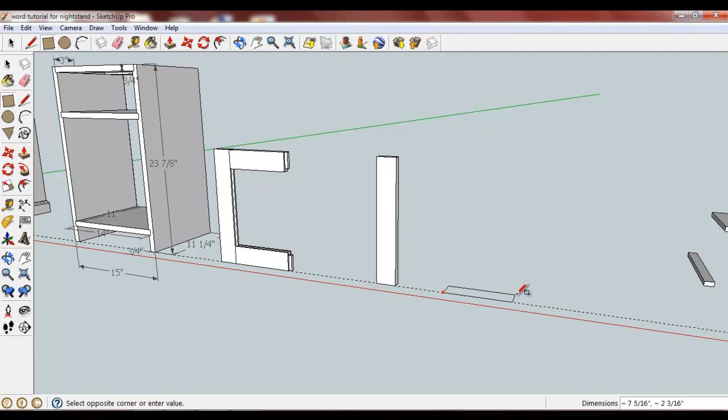We can draw it upwards like so. It's going to be in width 8 5/16. So let's go with 8 5/16, comma 10 3/16.

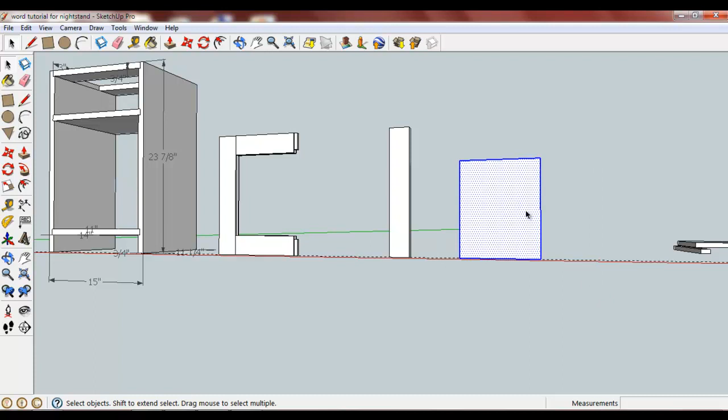And we'll call this the door panel. Great. And this door panel can be moved right into place as well.

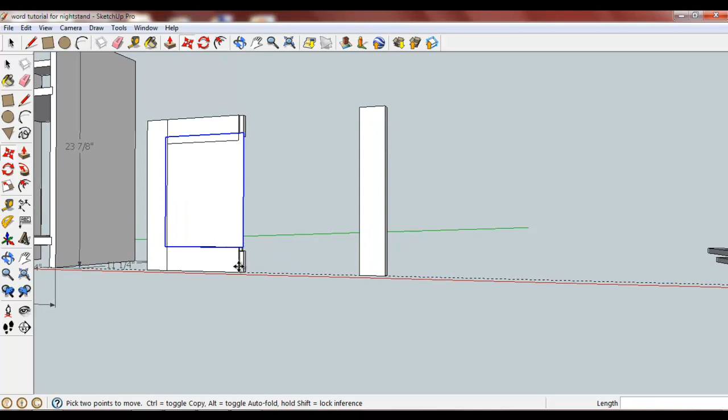I forgot to push-pull it. It's a 1/4 inch thick, 0.25, so make it a 1/4 inch. Okay, now it's ready to move.

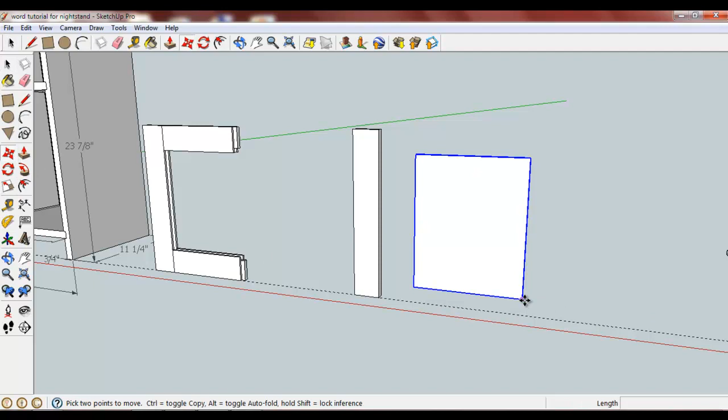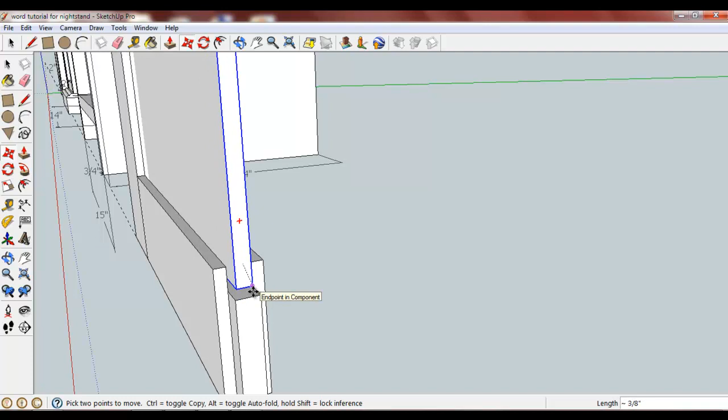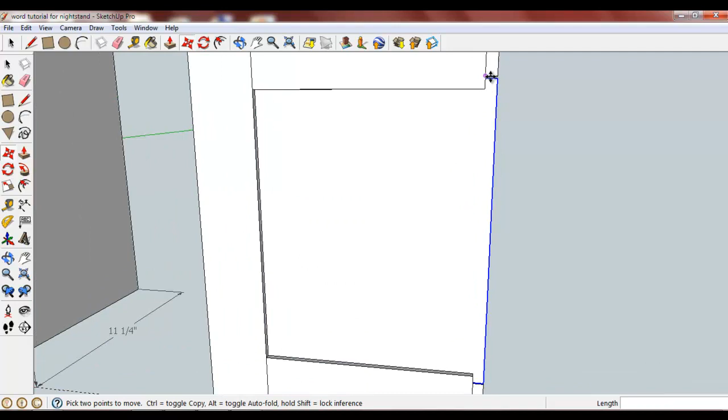And it should wind up being about a 1/16. You notice it has some free play in there because our opening is supposed to be 3/8. And you know, you could place this pretty much anywhere right in there because this panel has some free play. You notice there's a 1/16 gap there, that's fine.

So we could move this over just a hair. And what we could possibly do is, if we wanted to be very precise, is draw a tape measure guide over 1/16. And you can see how close that placement was.

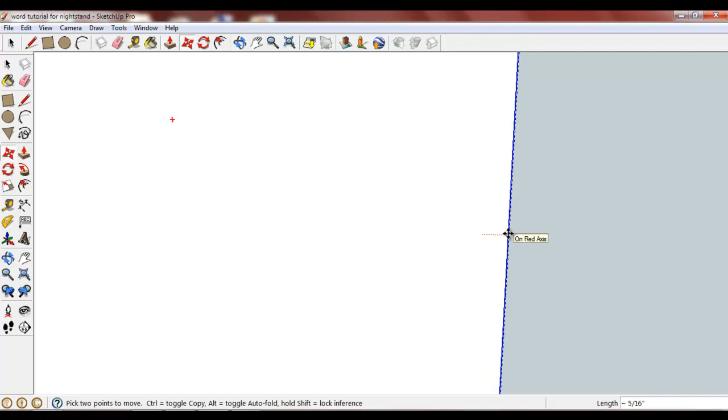Now if I wanted to place it right on that line, I don't know if I moved it up or down. Looks like I did. So there we go. That just kind of helps you place it better, and then get rid of these guidelines

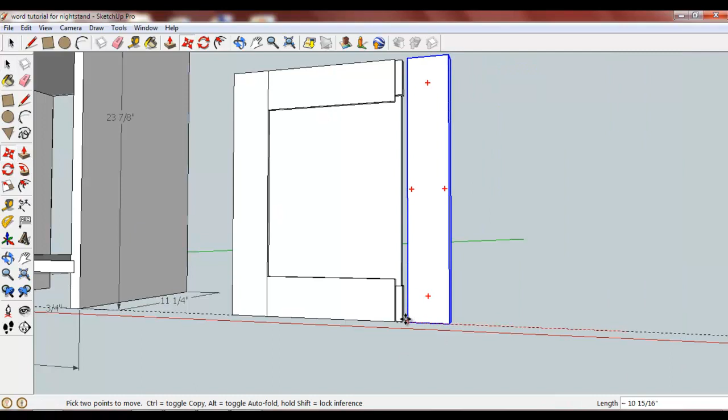that we don't need and move this last part over. And there's our door.

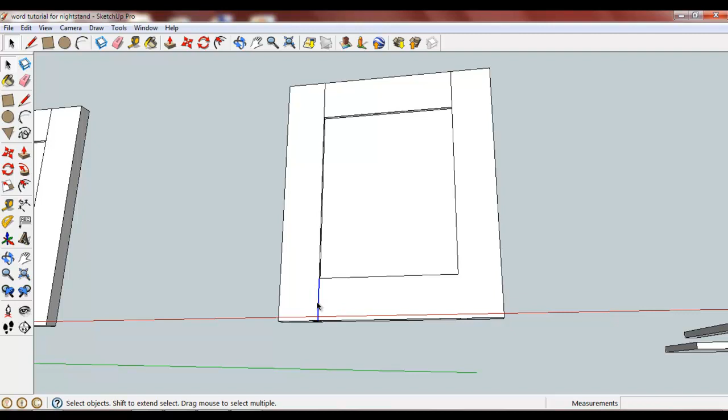Alright, what I did is I just made a copy of what we just made. I'm going to right click and explode everything. And then I'm going to get rid of this line, this line, this line, and this line.

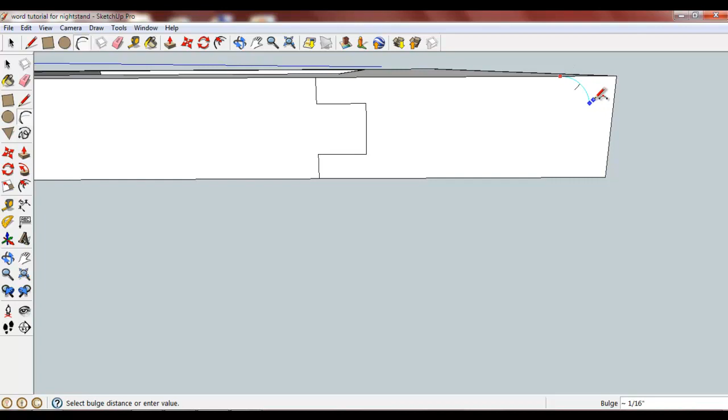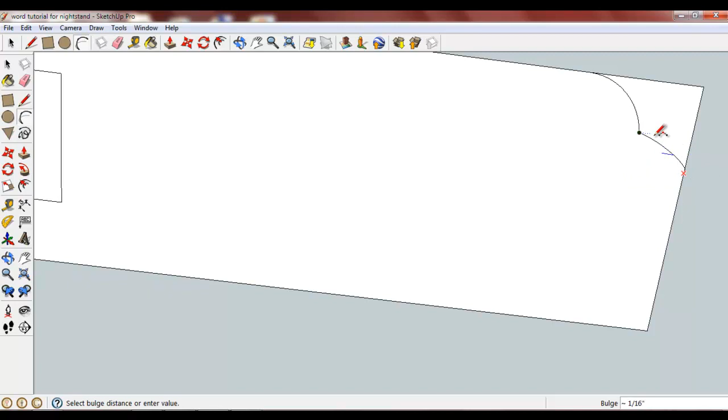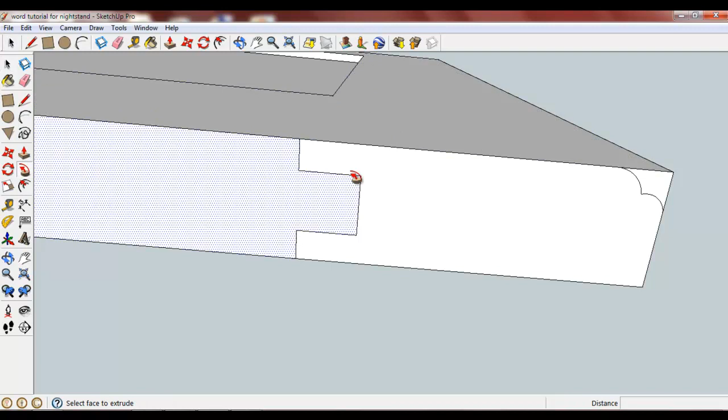What I'm going to try to do, I'll redraw that part, is just put a decorative edge around this. Zoom out a little bit, and let's select this top edge, follow me, and it looks like it worked.

Okay, so that's something that we can actually put on our drawing, and we could add back in some of these lines.

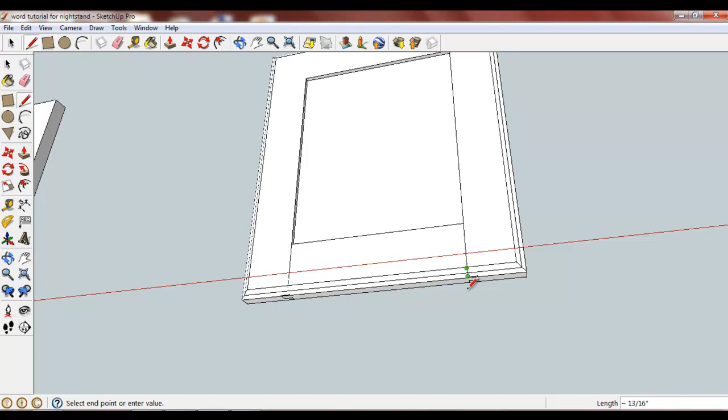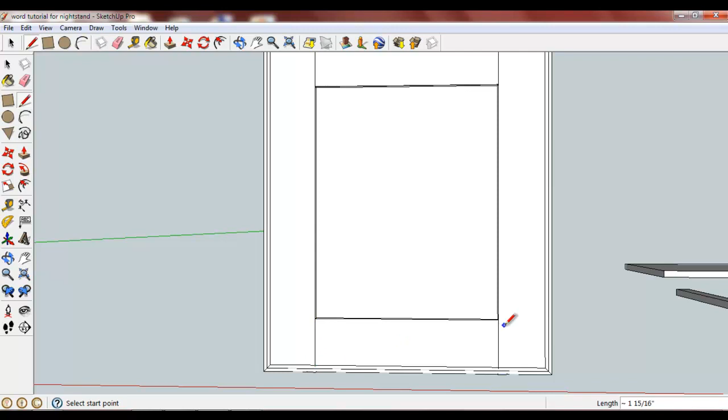Make it look more like a real door. There's probably a certain trick that I'm not aware of to put that decorative edge on. There we go. But anyways, that looks more like a real door.

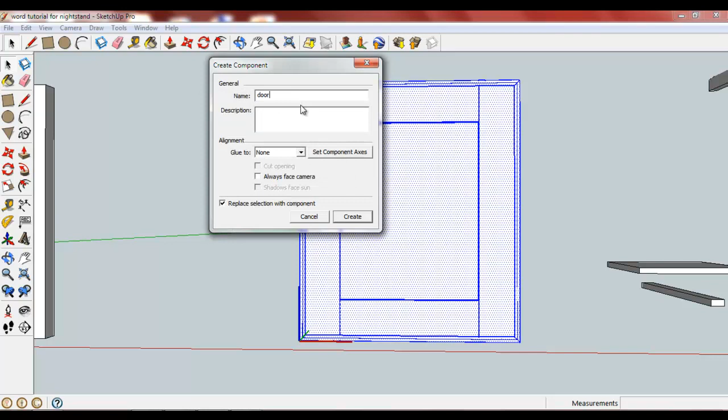And I'm just going to make that a component. We'll call it door, create. We'll call it door 3, why not? And create. There we go.

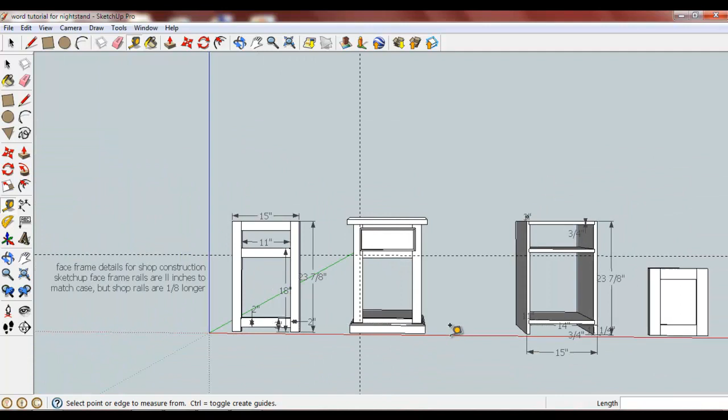And to put this on our case, we can use those 1/2 inch marks again. 0.5 that way and 0.5 this way will allow us to move this door right onto our case. So if I grab it in the right spot, which would be right back here, put it right there, it's now on our case. Okay?

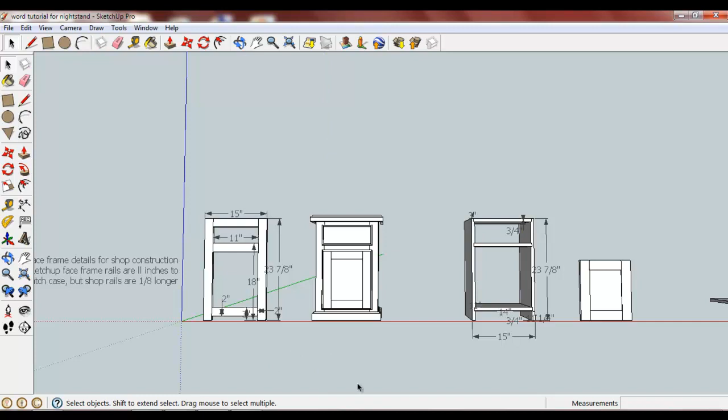And the final thing that we have to do is just put the back on. So I zoom in and around. Need a good measurement here for our back.

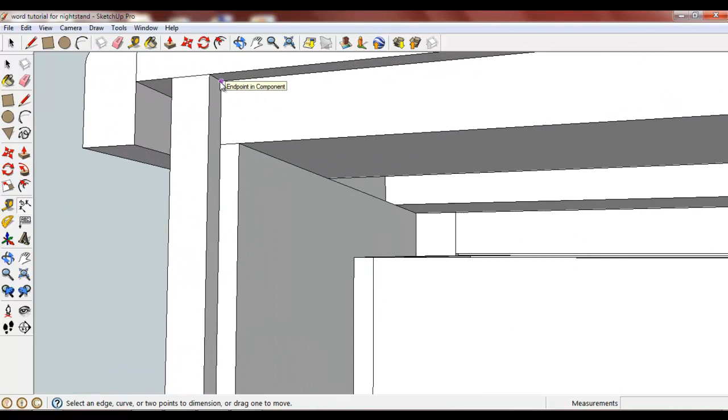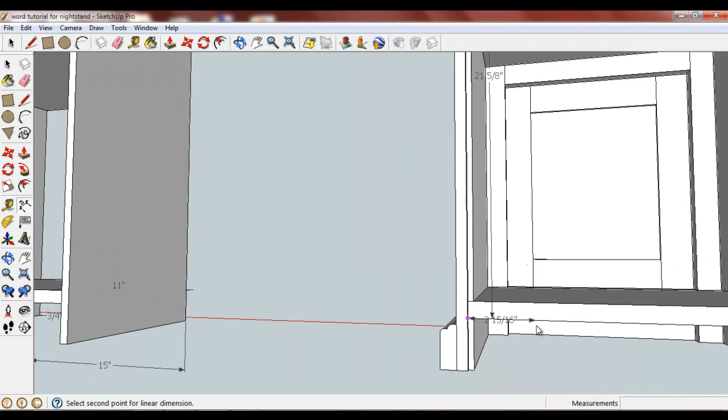And we're going to go from that inside point to that point, which is 21 5/8. Then we'll go from this point again, 14. Okay, 21 5/8 by 14 is the rectangle we need.

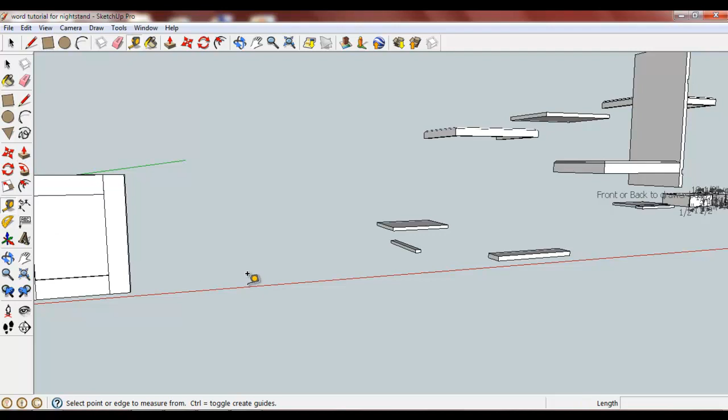So let's draw a rectangle 21 5/8 by 14. 14 comma 21 5/8. There we go.

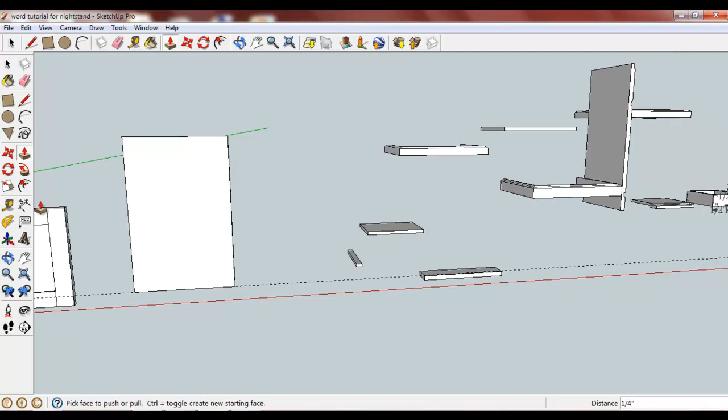Push pull that back 0.25, and that's our back, and we'll make a component out of it and call it back.

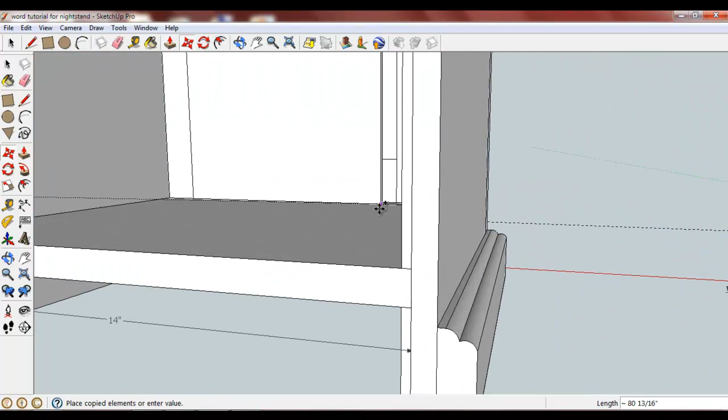And we will move it and copy it. And place it here in just a second.

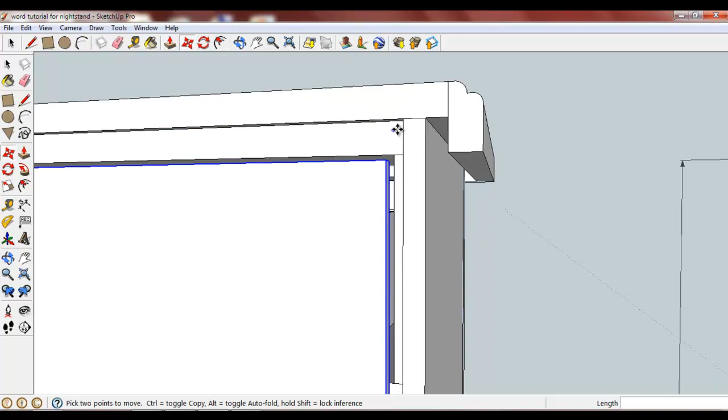I want to find the best spot to put that at, and probably this point right. In other words, these 2 points here are going to have to match right there. And there's our back.

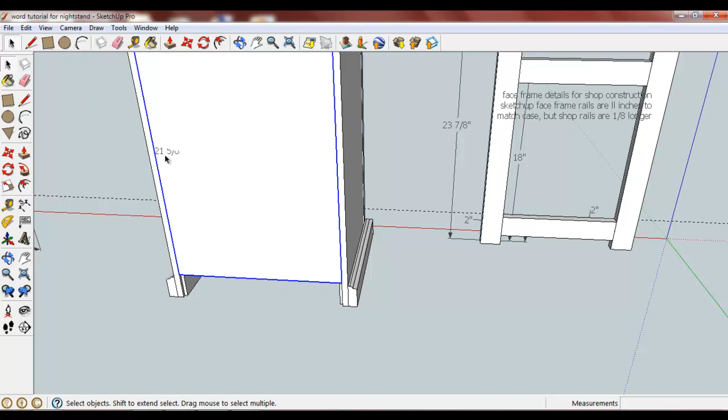And just delete that. If I could look inside there, or just move this back off and select that dimension that I don't need anymore and put this back on.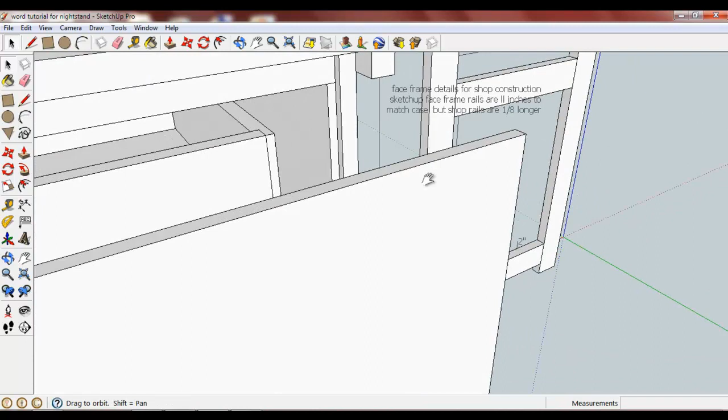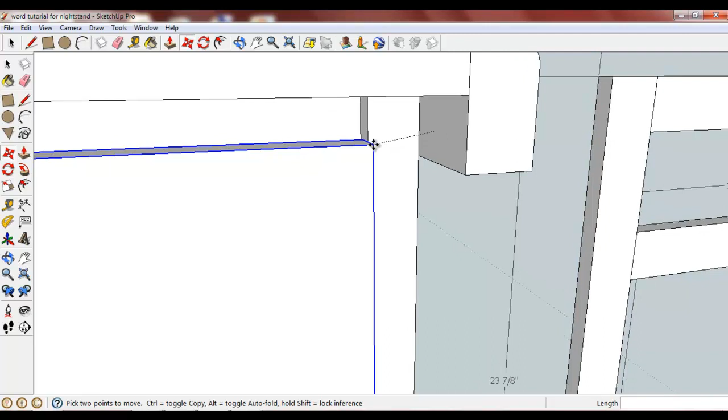Move tool, zoom way in here. There's our point right there. Trying to get it. There we go.

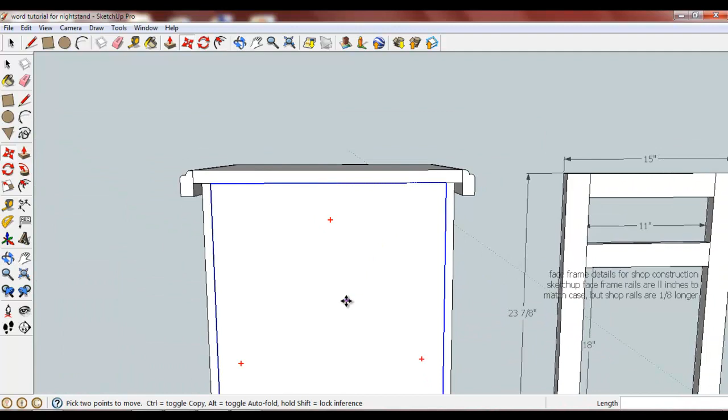Endpoint in component. That's what I wanted to see. Got it placed. And everything's looking good. All we need is some hardware on there, and it would be completely done.

That completes the nightstand drawing. Thank you.